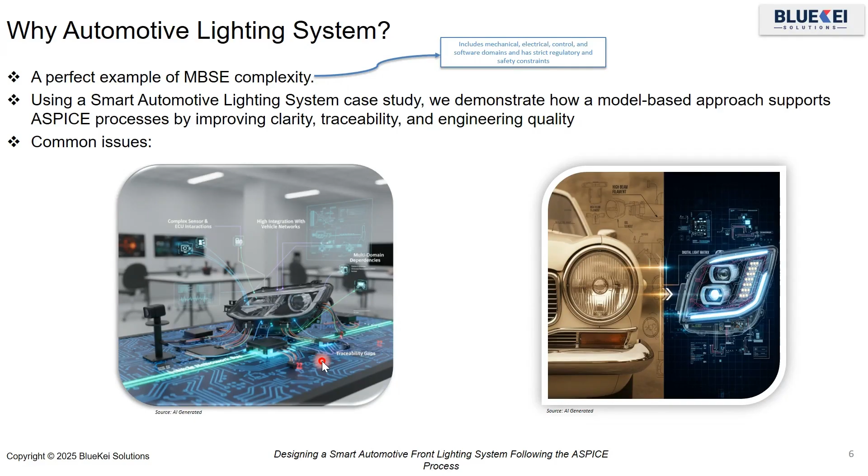So, using a smart automotive lighting system case study, we demonstrate how a model-based approach supports the ASPICE process by improving clarity, traceability, and engineering quality. Here you can see in the image there is a normal headlamp, and then the transition is the LED lamp. For this transition, there will be common issues: complex sensors and ECU interactions, high integration with vehicle networks, multi-domain dependencies like software, hardware, mechanical, and then traceability gaps.

So now let's go in deep about what automotive lighting systems are and how they work. I have compared an on-off switch to advanced systems. The on-off switch is a combination of headlamp switch, relay, battery, headlamps, fuses, and wiring harness. With the combination of these components, reliable headlamp operation works.

And then coming to the adaptive lighting system. We have a headlamp control unit, advanced light sources, which provide efficient and bright LED laser illumination, and communication interfaces, which integrate with vehicle systems for enhanced functionality, and a user interface, which allows drivers to customize lighting preferences easily. With the combination of all these things, optimal light performance is obtained. Here you can see the transition of a simple on-off switch to an adaptive lighting system.

For example, imagine the vehicle is passing over a speed breaker at night. As the car pitches upward, the headlamp beam briefly points away from the road. Even a 1 second loss of visibility can be risky. A smart headlamp system detects this motion instantly and adjusts the beam angle so that the driver always sees the road clearly. Which is why modeling is important and it matters.

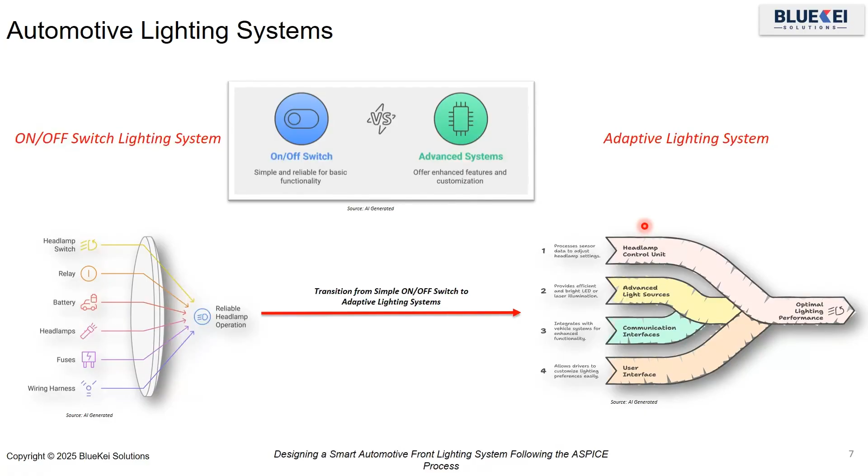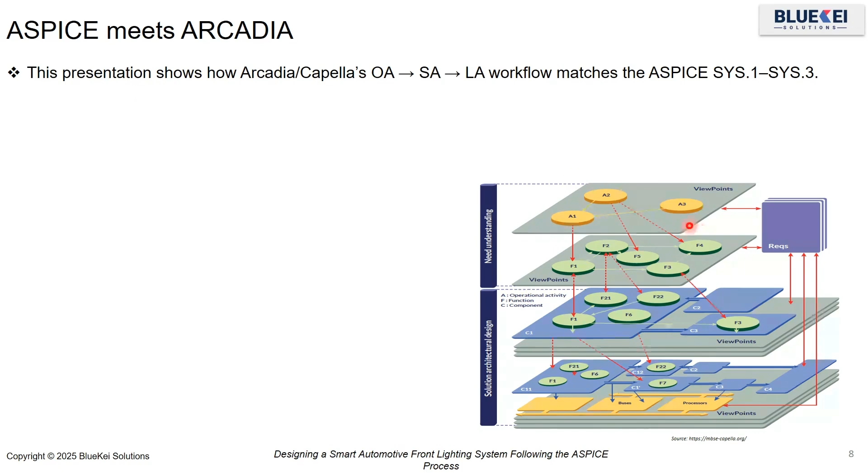So what is that? ASPICE meets Arcadia. In this presentation, I'm going to compare Arcadia layering with ASPICE SYS.1 to SYS.3. ASPICE defines the required engineering process to ensure maturity, consistency, and traceability. So here comes the handshake between Arcadia and ASPICE.

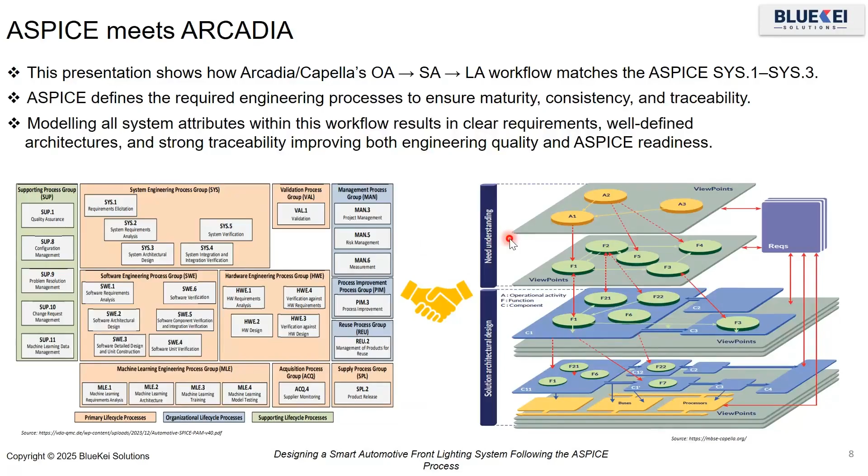So now let's understand what ASPICE is. ASPICE stands for Automotive Software Process Improvement and Capability Determination. It is a process assessment model, PAM, and process reference model, PRM, for software, hardware, and mechanical, as well as cyber security. Let's see those.

So teams who design and develop products for the automotive industry are using the ASPICE process very much. So let's understand this process. This ASPICE V model shows how different engineering groups contribute their inputs step by step. Each layer adds its own specifications, designs, and tests. When all these inputs come together in the correct sequence, they form a complete high quality product.

Here you can see there are different groups like the system engineering process group, software engineering process group, hardware engineering group, machine learning group, acquisition process groups, and so on. When many groups contribute to the ASPICE process, the challenges also grow in same proportion. So I am focusing on SYS1, SYS2, SYS3 artifacts.

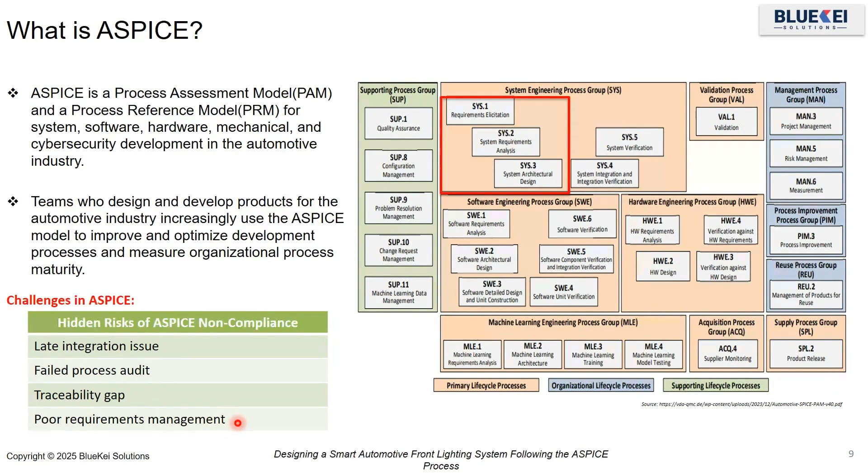So the challenges in ASPICE. There are some hidden risks of ASPICE non-compliance. There are late integration issues, which may lead to project delays, increased costs, and so on, like failed process audits, traceability gaps, and poor requirement management. So let's see how we can overcome this.

So the ASPICE process with Arcadia. Arcadia is a structured model-based design framework. Here you can see all the layers: operational analysis layer, system analysis, logical architecture, physical architecture. I am focusing on the operational analysis to logical architecture layer. So let's understand what those are.

So the operational analysis layer. In the operational analysis layer, we define about the system, like stakeholder needs and operational capabilities. In the system analysis layer, it is a black box, but we define our system as a boundary, and we define functions in the system analysis layer.

Coming to the logical architecture layer, here we allocate system functions to logical components. We derive logical components and the interaction between the system. Here we know about the system and what is going on inside the system. So let's map these to ASPICE.

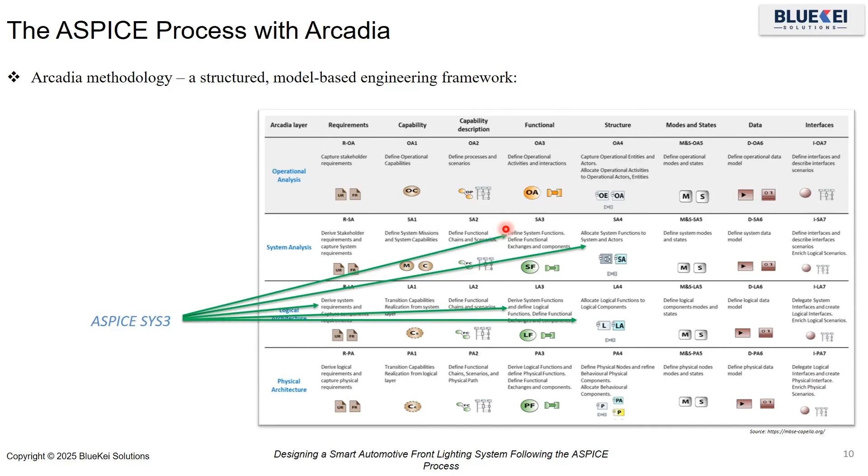In ASPICE SYS1, what are we capturing? We capture stakeholder needs, stakeholder requirements, as well as some entities. In ASPICE SYS2, we derive system requirements and some system missions and capabilities. Coming to ASPICE SYS3, here we define system functions, logical components, and some architecture models. So now let's go in detail about each layer.

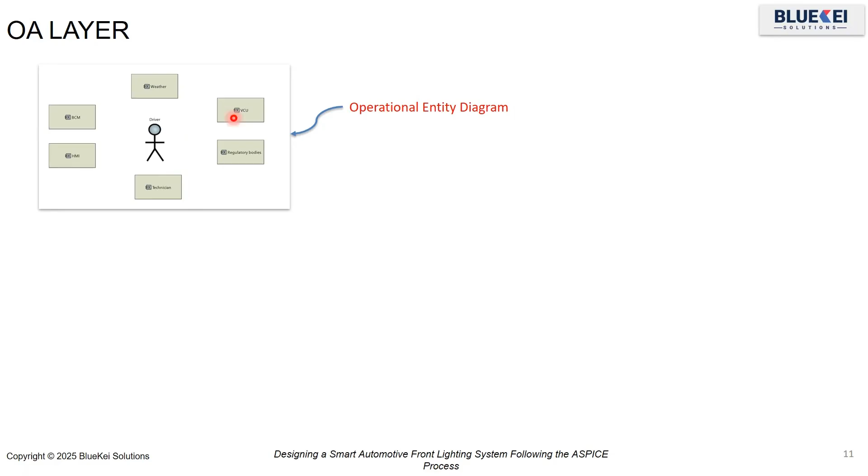So the operational analysis layer. Here we don't talk about the system; we talk about the real world operations and who interacts with the feature. For example, my use case is a headlamp. In the operational entity diagram, we identify all real world actors involved in the smart headlamp feature, like driver, weather, VCU, regulatory bodies, technician, BCM, etc.

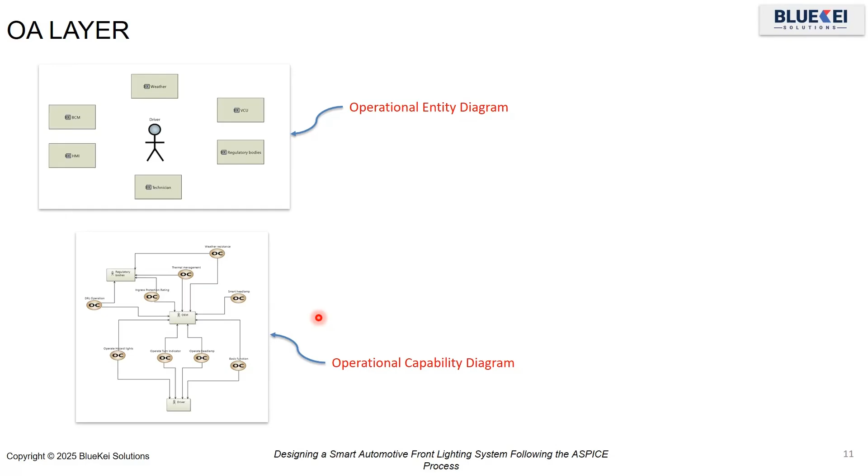Then coming to the operational capability diagram. Here we define what operational needs need to be achieved. For example, I have thermal management, weather resistance, smart headlamp basic functions, operational headlamps, etc. Here we define the needs, which are nothing but the stakeholder needs. Then we derive stakeholder requirements from the stakeholder needs.

Then moving to the system analysis layer. Here we define the system boundary and how the system should behave to support the operational needs. Now let's see the system contextual diagram. Here we define the system boundary of the smart headlamp, our system, and the interacting units and actors. Coming to system requirements, here we refine the stakeholder expectations into system requirements.

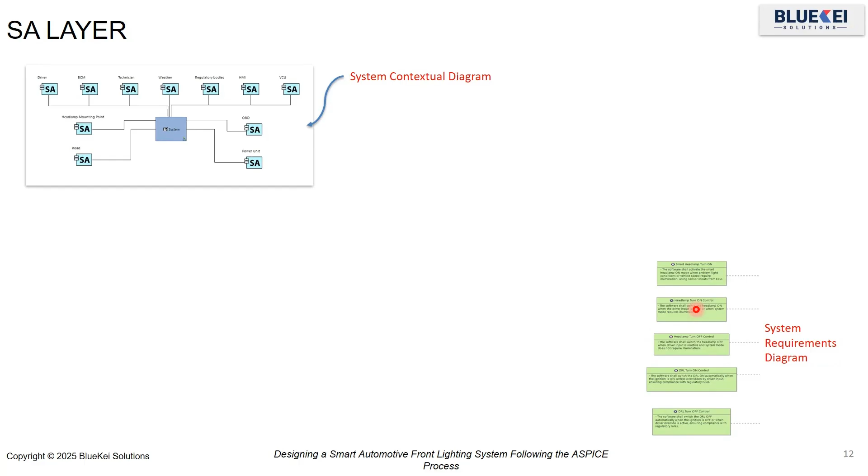Then the system data flow diagram. In the data flow diagram we show how information flows between two functions. Here it is a flow of a headlamp. From start to end, how the communication is and how the two functions are interacting, we can show in this data flow diagram.

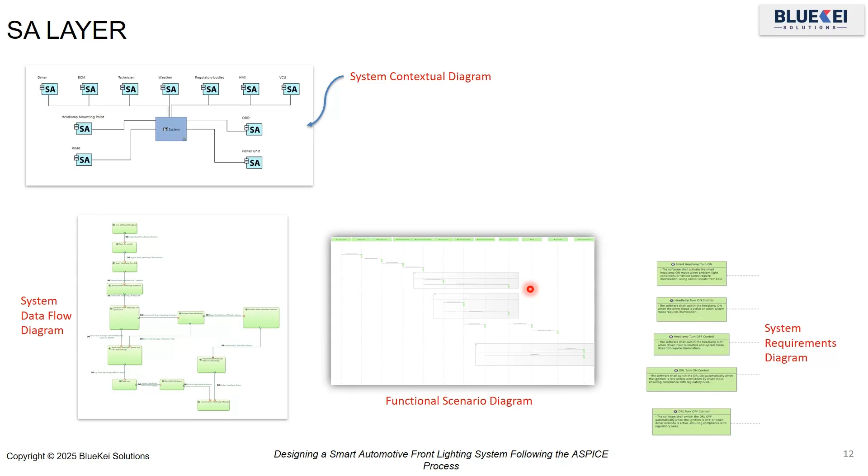Then the functional scenario diagram. Here we illustrate the dynamic behavior using a scenario. For example, if there are any timing parameters or any scenarios, we define those using the functional scenario diagram. And then comes the system architecture diagram.

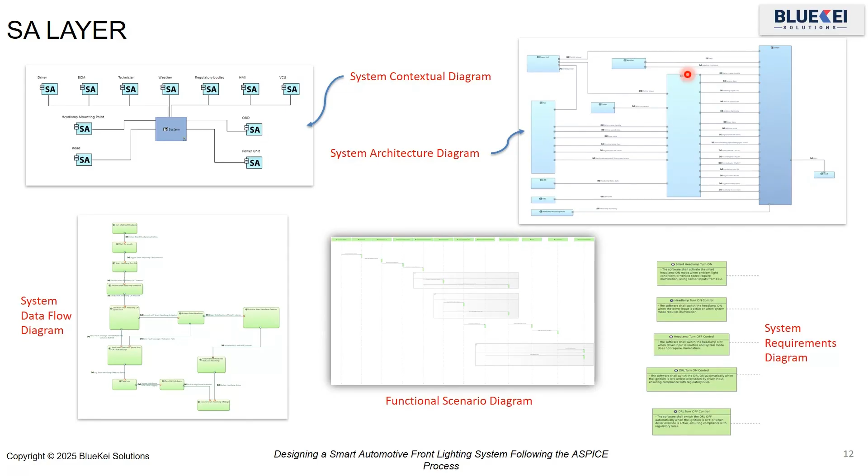Here there is a system and some external actors, which you can see here. You can see what information enters and what information leaves. There will be interactions between our system and the external actors. So now moving into the logical architecture layer.

So what are we doing here? Now we convert our system functions into logical components, the building blocks of the solution. In logical component breakdown, we translate system functions into architecture components.

Here you can see the breakdown of our system into subsystems. The headlamp control unit is my main system, and then the TI matrix LED unit, which is turn indicator, matrix LED units, actuators, electrical cooling unit, and DRL matrix LED unit. These will be some of the subsystems for the headlamp operation. And then there are the external actors, which are derived from the operational analysis layer and the system analysis layer.

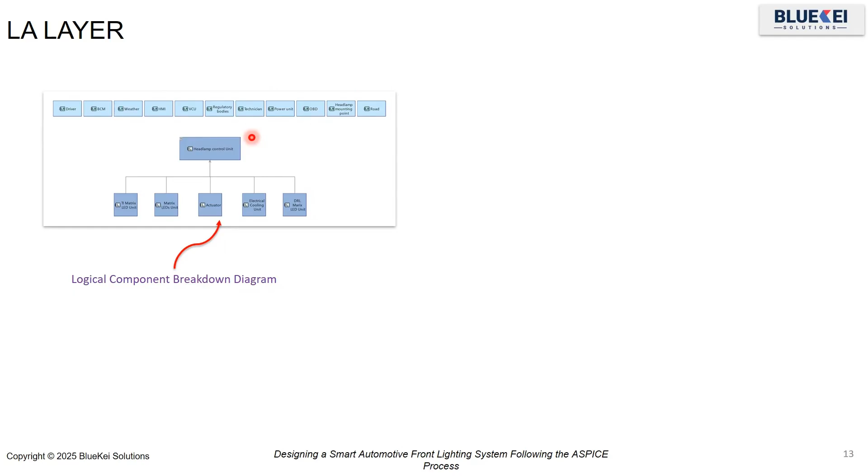And here comes the logical architecture at a high level. You can see this is my main system, and there are some logical components which are interacting. So here we can define our system in a white box.

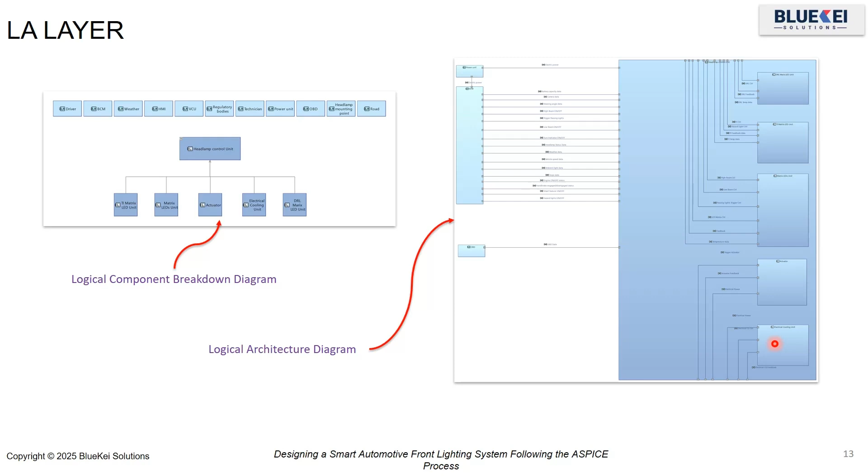So, questioning myself: till now we have done the modeling up to the logical architecture layer. What questions can we ask ourselves? Are there any requirements that are still unallocated? Have I checked the model for inconsistencies or missing links? Did I validate that the logical architecture fulfills all system requirements?

Is every element in the logical architecture traceable to a requirement or a function? Are all interfaces clearly defined? Have I produced the work products expected by ASPICE? Is the logical architecture detailed enough to start software and hardware architecture activities? So I'm questioning myself, is this enough?

Let's check. So how does modeling in Capella benefit us using the ASPICE process? ASPICE measures how mature and consistent your development process is. We have ASPICE capability levels from level 0 to level 5. Each level tells how well a team performs its process.

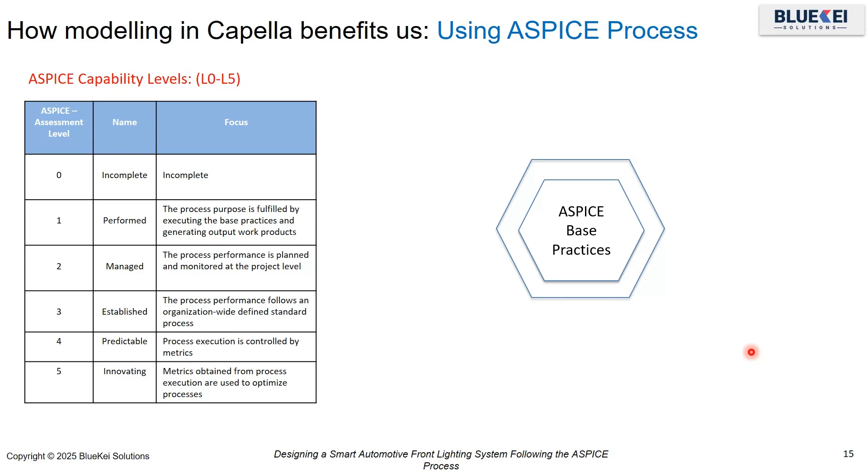I took some of the base practices which are very important to my process: specify system requirements, structure system requirements, develop system architectural design, allocate system requirements to functions and components, define interfaces, which is the ICD table, and ensure consistency. These are some of the base practices which I took.

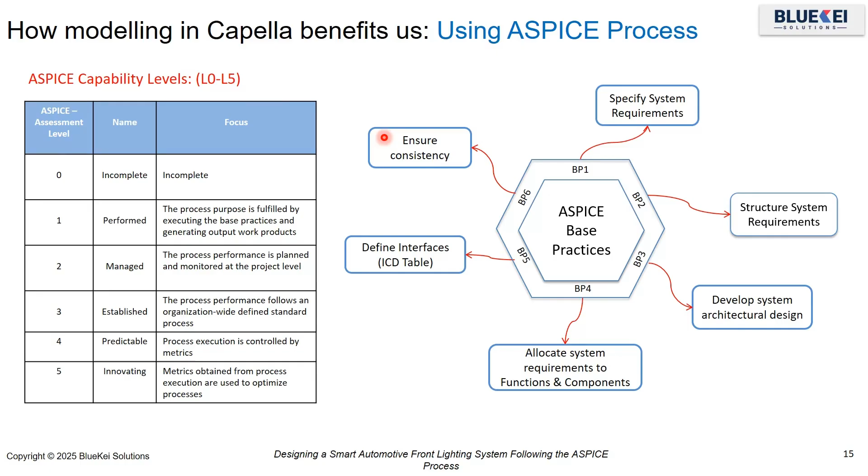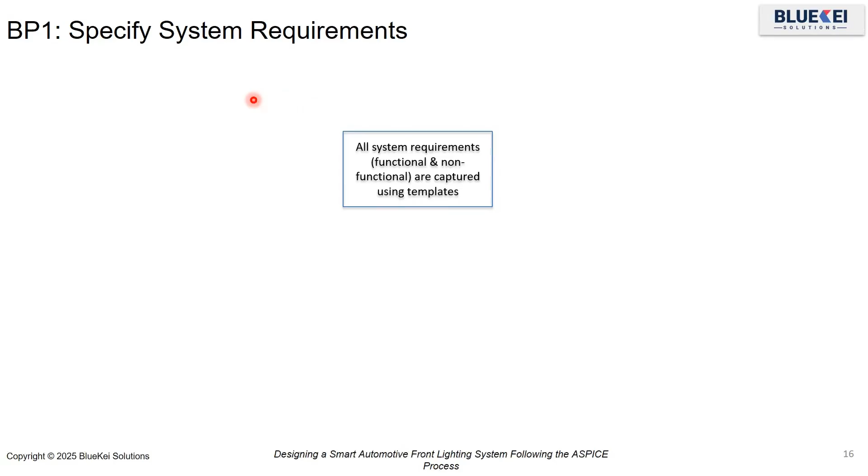Let's deep dive into these and understand what these base practices are and how we can achieve them. Base practice one is specify system requirements. What does this mean? All system requirements, functional and non-functional, are captured using templates. Before that, let's understand what system requirements are and their importance.

The quality of system requirements plays a fundamental role, especially when we consider advanced approaches such as model based systems engineering. Modern automotive vehicles are becoming more complex day by day, incorporating a wide range of onboard electronics, software, and mechanics to meet demands for safety, comfort, and efficiency. In this highly complex environment, the clear and precise definition of system requirements is crucial. We need to follow correctness, completeness, consistency, change management, traceability, and testability.

So if you follow these steps, then it will lead to a good requirement and a success to a project. Poorly defined or misunderstood requirements can lead to delays, additional costs, and so on. So these are the system requirements which we have covered.

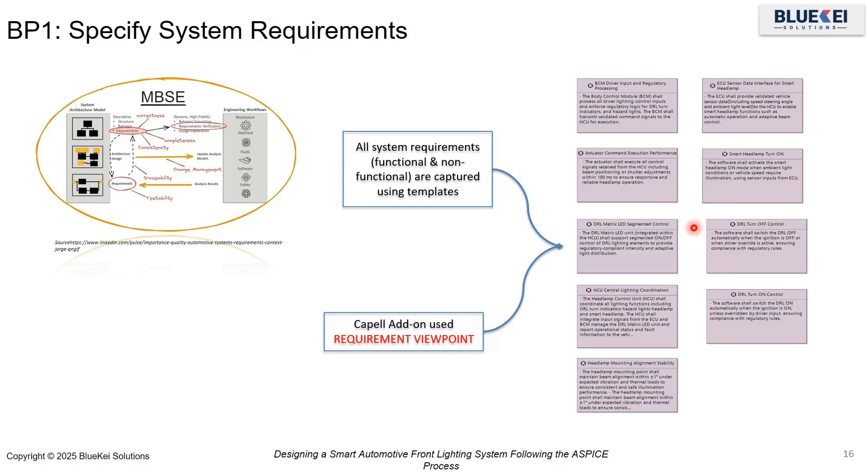And then how are we deriving these system requirements in Capella? We have an add-on which is Requirements Viewpoint. With the help of this add-on, we are deriving the system requirements in each layer. We can derive system stakeholder requirements in the operational analysis layer, and we can derive system functional requirements in the system analysis layer. We can derive component related requirements, which are design related requirements, in the logical architecture layer, etc.

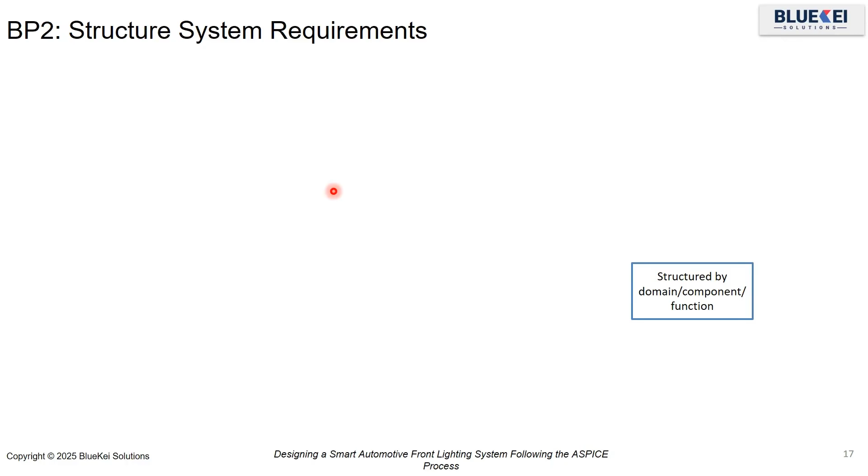So now let's move to BP2, base practice 2: structure system requirements. So what does structure system requirements mean? It is structured by domain, component, or function. Following the hierarchy is the main point here. ASPICE offers a structured approach to dealing with this complexity, allowing engineers to develop models that capture not only system requirements but also interactions between system functions

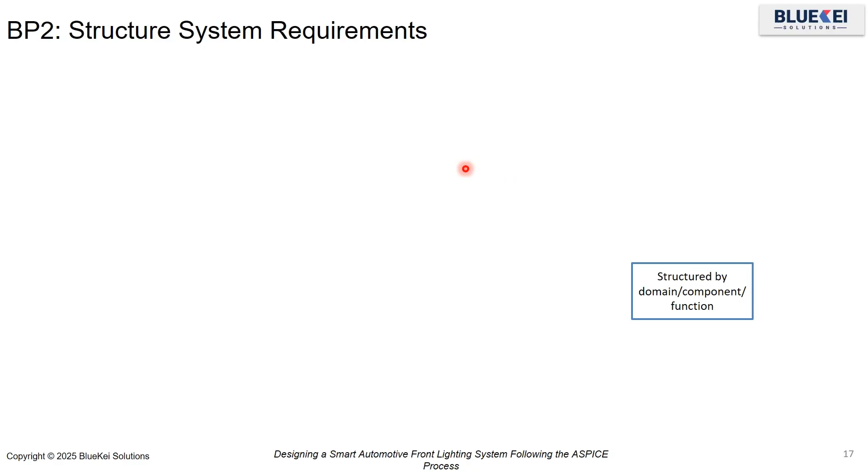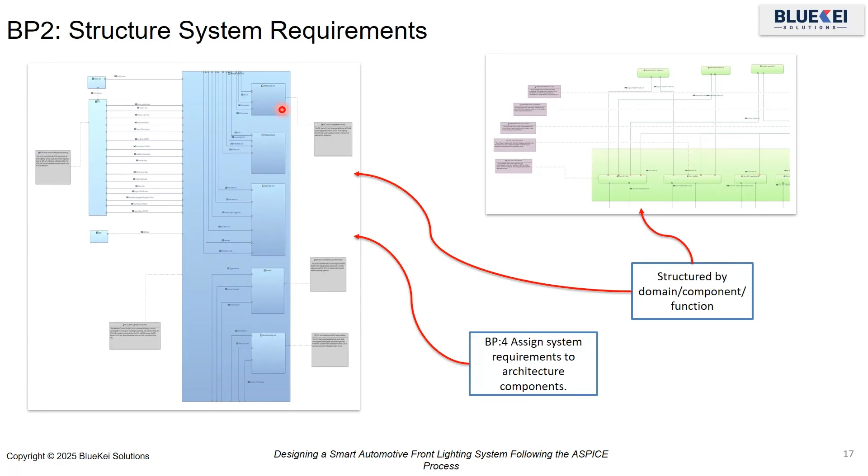and components. So here comes my functional architecture, and here come some of the requirements which I linked with particular functions. Similarly, I have linked component related requirements to my components. And then there is one more base practice, which is assign system requirements to architecture components, which you can see in this model. I have allocated my system requirements to my logical components.

Moving ahead, base practice 3, develop system architecture design. So what does this mean? It creates an architecture that satisfies system requirements. This is the main point. So here you can see we have derived system requirements, and then we have created the architecture that satisfies the system requirements.

So this is the architecture which you have seen in the previous slide, and here we have applied the legends. So what does that mean? Capella has an add-on which is Diagram Styler. With the help of this Diagram Styler, we can identify the structure of systems. For example, here you can see I have included the properties for each system.

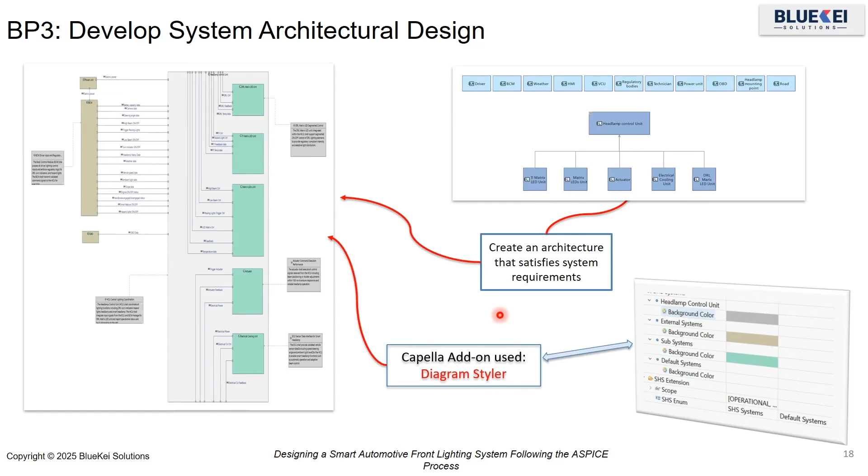For example, I had the headlamp control unit, which is the gray part, as one of my main systems, and then external systems, which are these, as one of my groups, and then some subsystems of my headlamp, which are different colors. Mainly this is useful to identify which group of systems comes under which. For the identification process it is very useful, and also for grouping purposes.

So let's move ahead. Define interfaces: the ICD table. What does this ICD table mean? Interface Control Document. It describes the interfaces between system elements clearly and completely. If you see in this image, there are source component, target component, and the exchange between them. If you observe the previous architecture, there are some interactions between components which we can extract like this in the form of an Excel sheet.

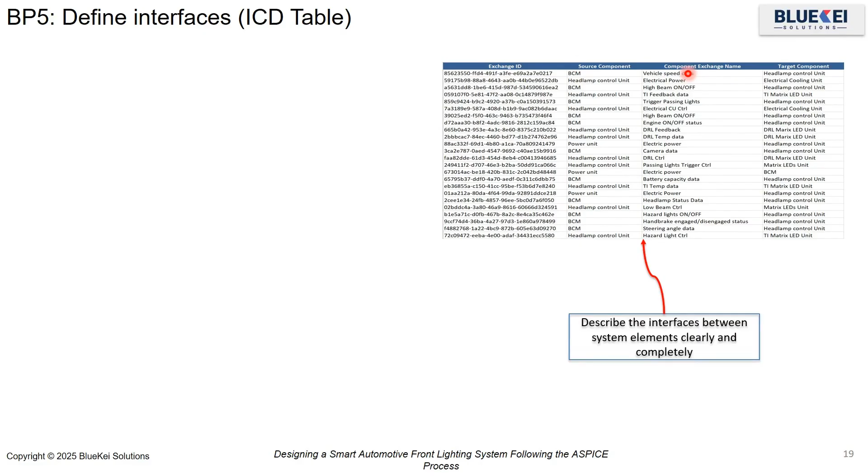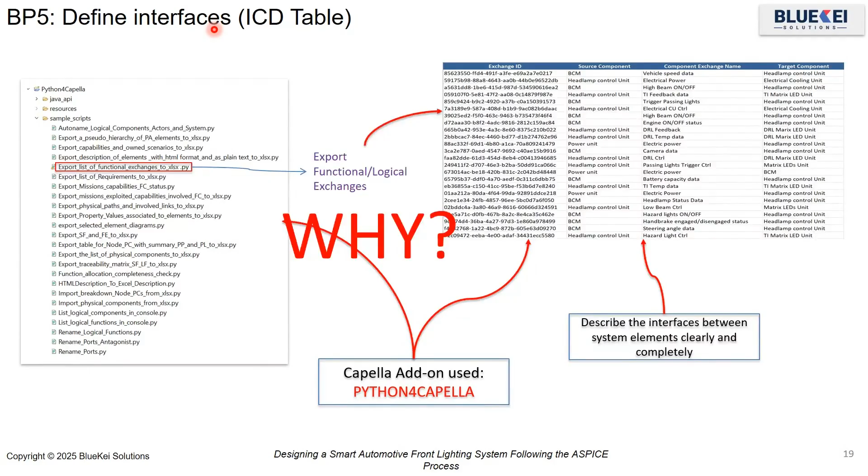So how are we extracting this? Using Python4Capella. There are inbuilt sample scripts for some of the aspects, from which I took export list of functional exchanges or component exchanges. So why are we defining this ICD table? Let's find out. If you observe here, the source component and target component and exchange between them. Checking for duplicates: this is my source component, this is my target component, and there is an exchange.

So what do these duplicates mean? Since multiple people work on the same project, they may accidentally create duplicate interfaces or define the same data differently. Using this ICD table, we can easily detect these inconsistencies and avoid duplications or interface errors. If you see here, there is an exchange between BCM and headlamp control unit, which is high beam on or off. And similarly, from BCM to headlamp control unit, this is high beam on or off. So identifying these duplications, and then checking for naming conventions.

There is an interaction from power unit to headlamp control unit, which is electric power, and then power unit to headlamp control unit, which is also electric power. If you observe here, even the caps: the P in power is small here and capital here. So this may lead to confusion.

So we can identify these types of errors with the help of the ICD table. Not only this, and what can we do with these ICD tables? The ICD table also serves as a key input to the software team, ensuring they receive a consistent and validated set of interfaces for implementation.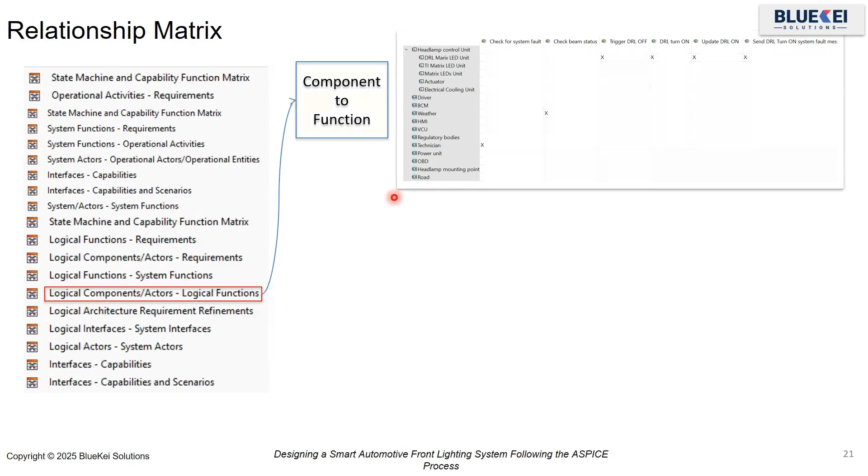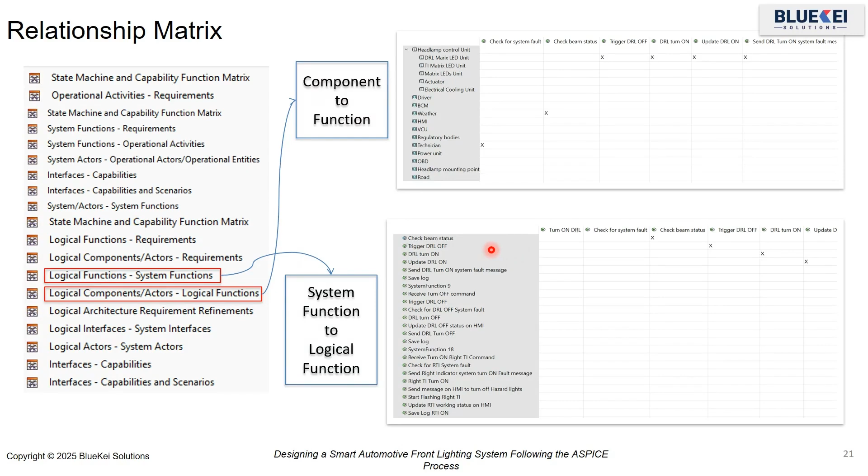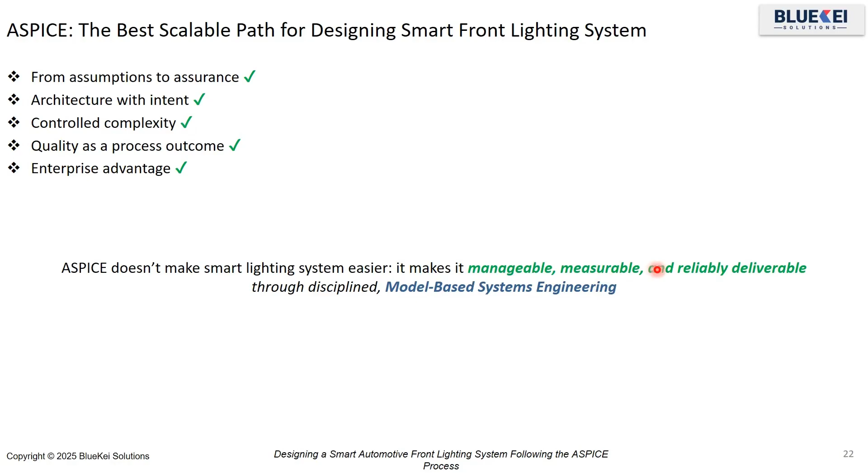So now I'm concluding with a tag: ASPICE doesn't make smart lighting systems easier. It makes them manageable, measurable, and reliably deliverable through disciplined, model-based systems engineering.